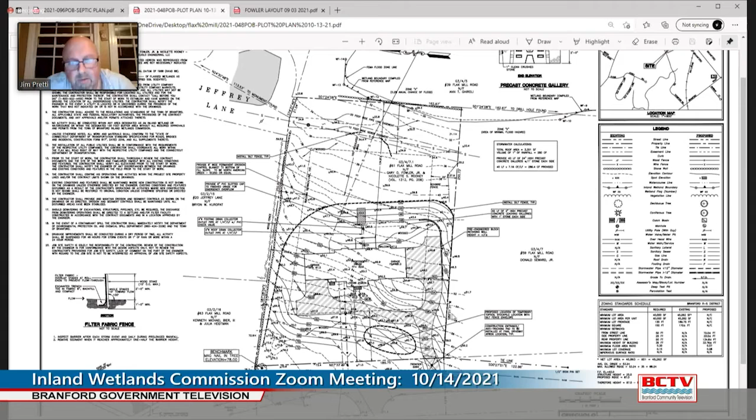Here's the plan: there's a garage over here, and again we're dealing with some slope on this lot, so we're coming in on the lower end. There's a garage at this end at the main level of the house. It's a one-story ranch house, with a walkout basement on the back and a garage under the side of the house. We do have the house plans I could show to clarify that.

But we are showing silt fence basically down along the whole property line, along the back of the limits here, and then along the other property line, a topsoil stockpile area, and the construction entrance.

Again, just because of the grades here, we did have to fill a little bit around the back, so there is this area right here that's within the 100-foot buffer. And then the sewer lateral has to come down and connect into the sewer line. The point I chose was from a stub that was left for this property when that sewer was put in, and that's the approximate location of the stub from the engineering department records. But if we needed to angle this and come up the hill at a slightly different location, we could figure that out in the field. We would put some silt fence around this so the trenching would be protected from migrating any farther east.

That's it. Single family home, public utility connections other than the gas and water are in the road, but the sewer is in the back.

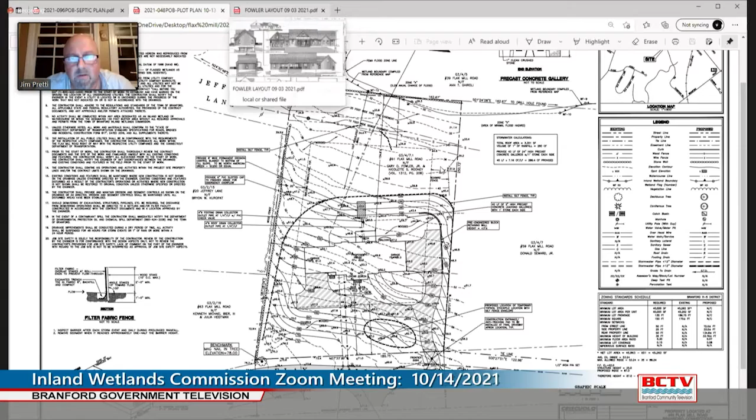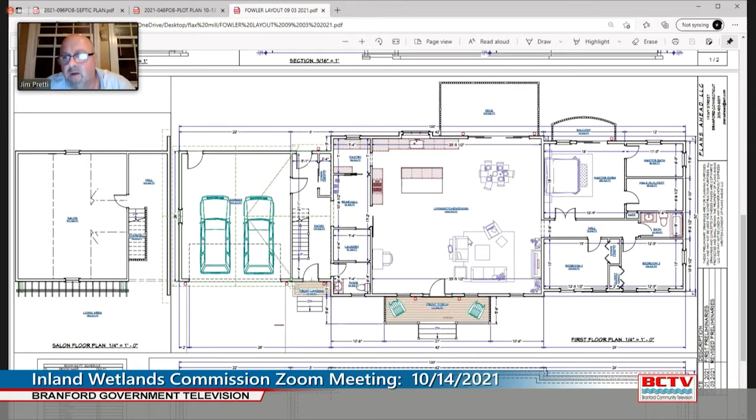No, this is a house for the Fowlers. In fact, here's the house that they're going to build. You can see here's kind of a rendering of it, and this is the front elevation, and then there's the side with the garage under on the end. But it's a little bit spread out because it's a ranch, but I think because of the height regulations in town, it couldn't be a 2-story house because you have to take the average grade and it does drop off. So they are trying to fit it into the slope as best as we can.

Jamie, Commissioner Basserman, your comment about an updated delineation. Can you say more about that?

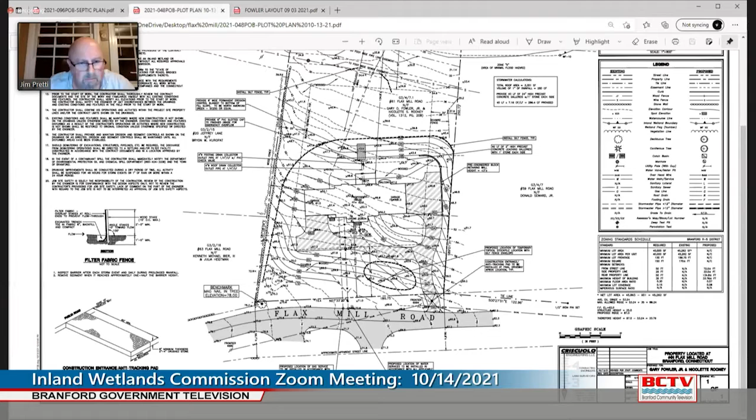I was going to mention that I do have. Can you see that? Can you see the different map now? This was the LWF survey of that rear piece, and you can see here's our lot. The wetland comes in here, and then because they were off property, stopped, and then they started again. If you looked at the contours and the FEMA line, it's 99% sure it doesn't really migrate any farther upstream than what we show on this other plan. You can see the way the contours are all curved this way here.

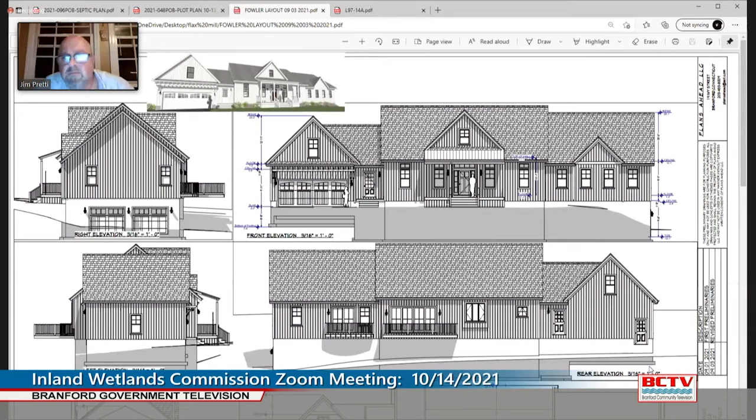Pretty consistent. But this plan, to answer your question, let me go back. This was 1999, this LWF map. I guess, given the lack of variation on the existing 99 delineation, is there much to be gained by an update?

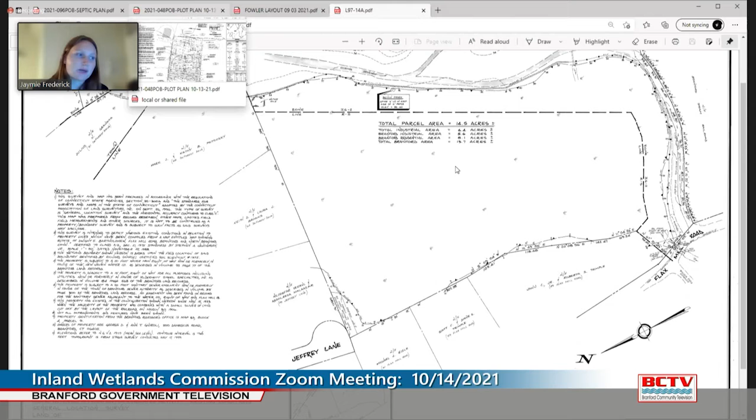Jaymie Frederick, Inland Wetland Agent. I think the majority of the activity is pretty far away from the wetland, so if the commission is comfortable with the information on hand, I think that could be reasonable. Any future activity that might be beyond the proposed limit of disturbance or silt fence would trigger needing the updated wetland delineation. However, that is up to the commission to decide. Ultimately, there's a little corner where there's probably a little bit of on-site wetlands in the southeast corner of the site, right here. But the upland review area was kind of extrapolated, assuming that. So I think it's a pretty reasonable approach.

Commissioner Greenwich: I believe that this can be given to Jamie as wetlands officer to handle administratively. The amount of grading within the 100 foot is very minimal, and the only real activity is putting in that sewer line, and that's a pretty cut and dried thing, and none of it approaches the wetlands itself. So I would recommend that we let Jamie handle this administratively.

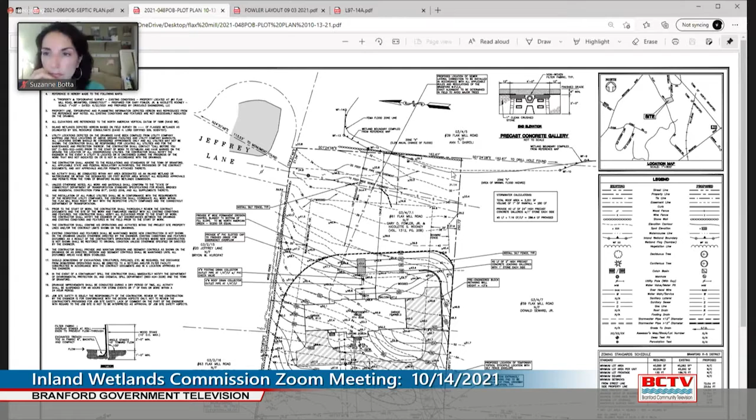Is that the general feeling amongst the commissioners? This is Commissioner Botta, I agree. Commissioner Begum: Are there anyone that would not recommend agent approval? Okay.

Thank you. Inland Wetland 211003, 49 and 81-111 Commercial Parkway, the construction of a last mile e-commerce station.

Materials in your packet. We believe we have somebody for this application on the call this evening. You do, Mr. Chairman? Before you start, Mr. Nuff, Jamie, is there anything that you've asked Mr. Nuff to pay particular attention to in what he's going to present tonight?

Jaymie Frederick, the wetland agent: Not particularly. We did talk a little bit about the stormwater management and how important that is given the watershed. I will hand it over to the applicant without further comment. Sure. Thanks, Jamie.

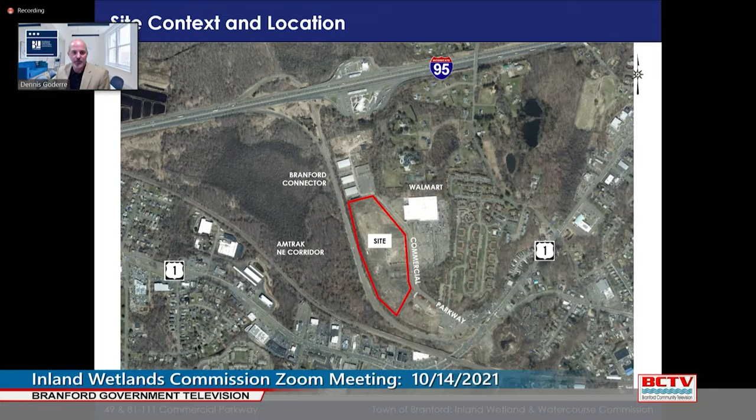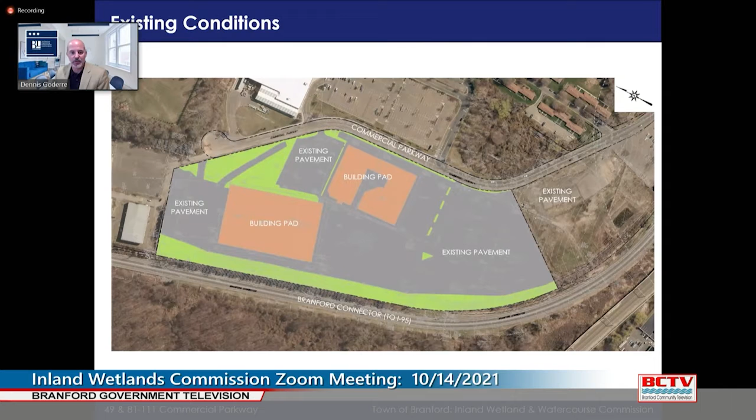It's located between Commercial Parkway and the Branford Connector, with access from Commercial Parkway across the street from Walmart. As I'm sure you're aware, the site has been substantially developed for many years. There are existing building pads that remain, as well as a substantial amount of existing pavement, equaling over 85% of the property being impervious coverage between building and pavement itself.

Before you is the proposed site plan. You will see the building located on the south side, on the right side of the page, is the delivery station of approximately 98,000 square feet. This is serviced by a loading area where deliveries will come in, then be sorted and loaded onto delivery vans where they will depart the site through this drive. Parking area to the south is for employees, and the parking area to the north is primarily for the delivery vans, which also has infrastructure for EV charging for electric vehicles.

There is one wetland pocket located here, and you can see the upland review area—I'll provide more detail on that later. And then the other offsite wetland finger is located down here to the southwest, and you can see the upland review area as well.

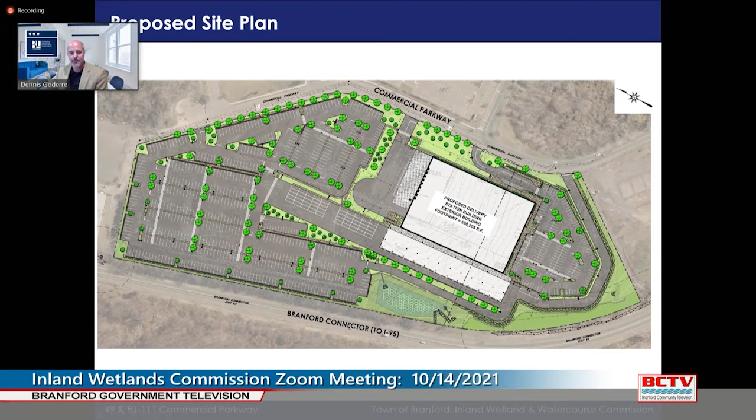Specific to the regulated activities, for the northern wetland there is a small area here which would be some pavement as well as landscaping within that upland review area—again, no filling of the wetlands. And then along the southeastern wetland finger, it is landscaping, retaining walls, and pavement to accommodate the circulation of the site. Overall, we are reducing the amount of impervious coverage within the upland review area by almost 35%.

There's almost 19,000 square feet of impervious coverage that exists today, and we propose to bring that down to just over 12,000 square feet, for a total of about 0.81 acres of activity within the upland review area. That's not all new activity—that's just the total of where we are proposing. And this dashed line represents where the existing edge of pavement of the parking lot is currently today.

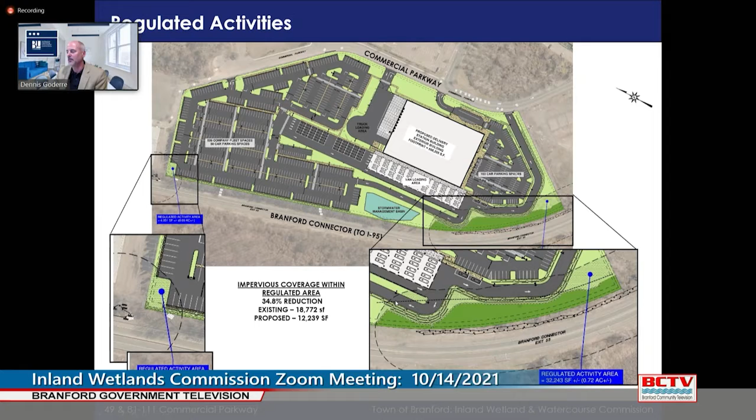This graphic represents the proposed stormwater management system. There's primarily, I'll say, three systems.

Starting on the north, we have a subsurface detention system that collects the runoff from the parking area before it is discharged off-site. There is another system in the middle which collects from the parking and then the van loading area. I should also mention that the van loading area has a canopy, so there's a roof over the pavement.

This discharges into an above-grade stormwater management basin, which then outlets out at this point before finding its way out into this wetland finger. There is a rain garden all along this landscaped island as well to help with stormwater quality and infiltration.

And then the third area is another subsurface detention facility, which handles the water before it is discharged into the existing pipe network, which is then brought underneath the Branford Connector.

There is also a small fourth system that collects runoff from the driveway for the vans that exit the site, and then is discharged into a level spreader. At that point, I'll turn it over to Matt Davison to discuss a little bit more about the wetlands.

I've never seen a piping collection and conveyance system designed for a 100-year storm. Typically design standards for different hydraulic features vary. For instance, typical piping designs are only a 10-year storm, whereas streams would be more of a 25-year storm, and significant streams would be a 50-year storm. The 100-year storm is just your worst case scenario, just to make sure there are no detrimental impacts downstream. Sorry, that's the long answer. But basically, standard engineering practice is for piping systems to either be a 10 or a 25-year storm, and sir, your town requires a 25-year storm in your subdivision regulations, so we opted for the more conservative 25-year storm design.

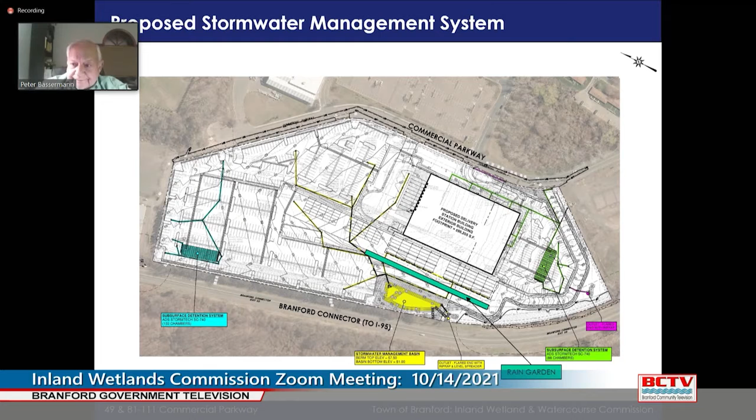Any other questions from the commission? About scheduling that site walk? We want to do that a week before? What about the next meeting? Are we looking at a Saturday, because we're losing afternoon daylight very quickly?

Just a quick reminder, the next meeting is a week early because of Veterans Day, so the next meeting is November 4th. If we were to do the site walk a week before, it would be October 28th, and sunset, since clocks don't change yet, is around 5:50. So you would probably want to have the site walk at 5:15ish, just so you don't run into daylight issues.

That may be a problem, because I think we've tried to do 5 o'clocks before, and people have other commitments. I'm okay with a Saturday if that is the commission's desire.

So I hate to say Saturday. Go ahead, I was just going to say the Saturday before would be October 30th, if that works for people. Yeah. I know it's not great, Halloween's coming, kid time stuff, but maybe in the morning, like 9 a.m. Is that terrible? Costumes optional? I have a commitment, but I'm sure you'll have a quorum.

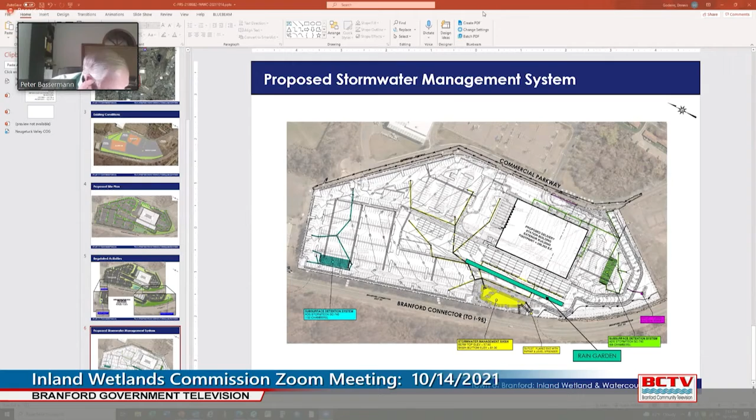Good, and it sounds like somebody from the applicant team can be present? Absolutely, so probably more than one of us. Okay, and just real quick, commissioners, is there anything that you want to have marked out in the field for reference purposes?

Yeah, this is Commissioner Boda — I think it would be helpful to have the basins noted, and probably the corners of the building. Okay, I'm sure we can do that. Commissioner Papantonis — and I'm assuming Commissioner Boda intended this also — the rain garden area.

So probably the stormwater management locations in general. What about the end of the retention wall for the south? The edge of that, Commissioner Bassermann. I think that would be good to know where that is. We'll do our best to indicate where all the primary construction activities will be taking place, whether it's the stormwater basins in the building, the canopy, the rain garden, the retaining wall.

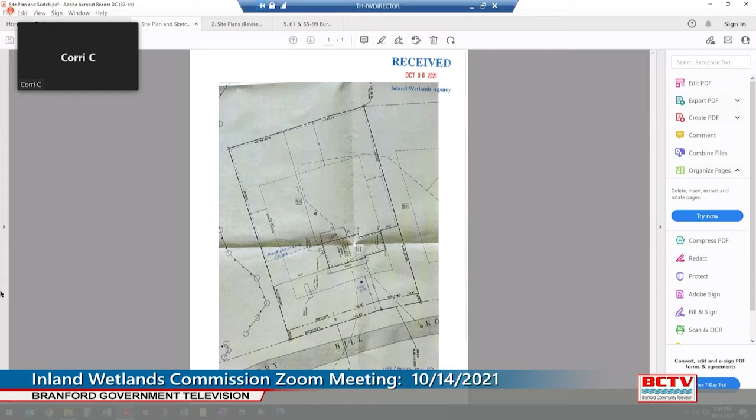Commissioner Bassman: Do you know how they intend to set the posts for that fence? Yeah, it's going to be 2.5-inch terminal posts with 1 5/8 line poles, 1 3/8 top rail, 6-gauge bottom cable. But how are they going to get the post in the ground? They're going to dig into the ground. It's a mixed cement post footing, but we won't be cutting any trees down, and we won't be moving any shrubs or vegetation at all. Machine to dig the holes or not? I don't believe so; the company we've received quotes from, it appears they're going to be doing it by hand.

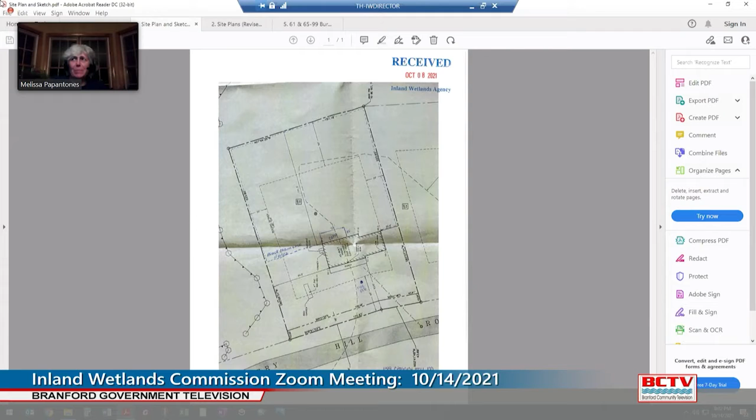I guess I would agree, it looks like a good candidate for agent approval. Anybody disagree? Commissioner Boda: I think it should go to agent approval. Anybody feel different? Commissioner Grenell: No, I agree, agent approval. Commissioner Kraus: I agree. Commissioner Papantonis: I think you can make it unanimous. Great, thank you for the summary and presentation.

Next up, applications for review. Inland Wetland 210801, 175 Cherry Hill Road, an 11-lot subdivision. Looks like this item is tabled, but we have a fee assessment review for this evening. Jamie Frederick: The applicant requested that the item be tabled because they're responding to comments that the commission had at the last meeting. There is a fee assessment for review, however I told them that probably would not be considered at this point until the additional materials are presented. I think we have that on there as a reminder, but I think it would be appropriate to table that item as well. Thank you, I think that's been our practice, so I agree.

Okay, Inland Wetland 210802, 61 and 65-99 Burban Drive, a multifamily residential development. Also looks like a fee reduction request on this as well.

Mr. Chairman, John Duff again for the record, 147 Broad Street in Milford, here tonight on behalf of the applicant. With me is Todd Ritchie, professional engineer with SLR. We were before you a couple months ago. The first night we were there, we discussed the possibility of agent approval. Jamie dug into the details a little bit, had a bunch of questions and comments. We have responded favorably to all those comments and questions, including the modification of the plan on the abutting parcel of property. Jamie has given you a series of conditions of approval, all of which we would be happy to accept. She asked us to discuss with you a little bit about the most important change in the plan, which is the work that would be taking place on the abutting parcel, and you have the authorization of the abutting property owner for that work. Just as a quick reminder, this site currently has no stormwater treatment, so one of the proposals is for us to provide stormwater treatment where none exists. So with that, let me give you Todd Ritchie, and he can share the site plan and describe the work that has changed from when you first saw this.

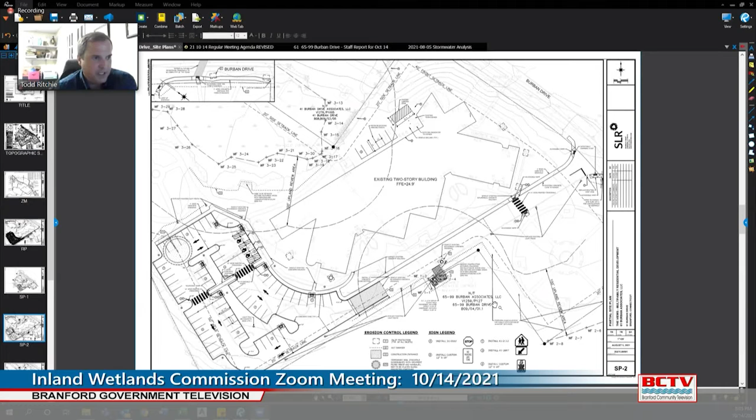As John mentioned, one of the items in the last round of comments from Jamie was about the stormwater pipes. You have one that currently flows from the wetlands to the north and to the south, underneath the building, and that channelizes the overflow from the wetlands. Then you have various on-site drainage pipes that also flow to the same location and terminate through an existing head wall that's right off the driveway.

The request was made, since this site has been in disrepair for some time, and the stormwater system hasn't been attended to, that this area has gained sediment over time. It's equalized between the two locations for its amount of flow to the north and south. So while we have equipment out there, we want to clean this out, establish a stabilized outlet for the future, and a location that can be maintained from sediment going forward.

So we've proposed a scour hole, which I'll show a detail of in a minute, located right at the head wall here. We've sized it for the 100-year storm per DOT standards. It's 12 feet long by 10 feet wide, with a depth I'll show on the detail. There'll be a tracking pad for a piece of equipment such as an excavator to sit in a stationary position, excavate out material, ferry it up to this location and onto trucks, and then offload riprap material to replace the excavated material and provide stabilization.

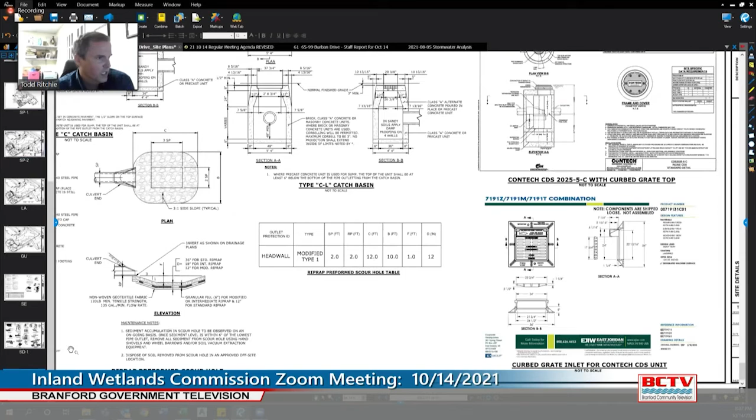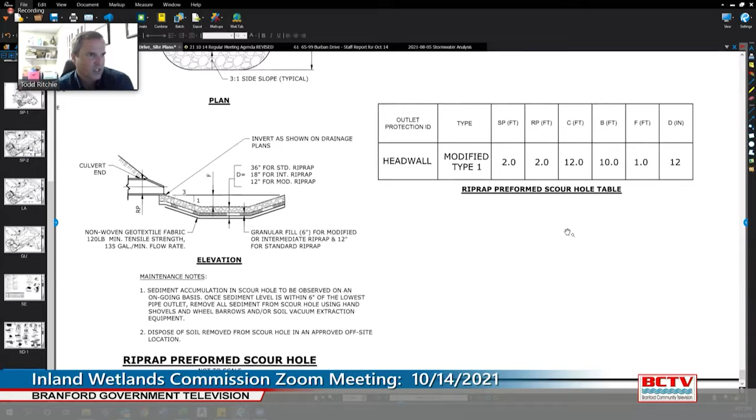I'll show the detail sheet we added this to. So here's the preformed scour hole made of riprap material. This will be at a 3-to-1 slope down from the outside edge, with a depth of 12 inches. Once this gets filled up to within 6 inches of the lowest pipe that discharges to the scour hole, we've recommended in the notes that it be maintained and monitored so that the material filling this 120 square foot area can be removed, either by hand or with a vacuum truck like those used for catch basins, which would be needed anyway for on-site catch basin maintenance.

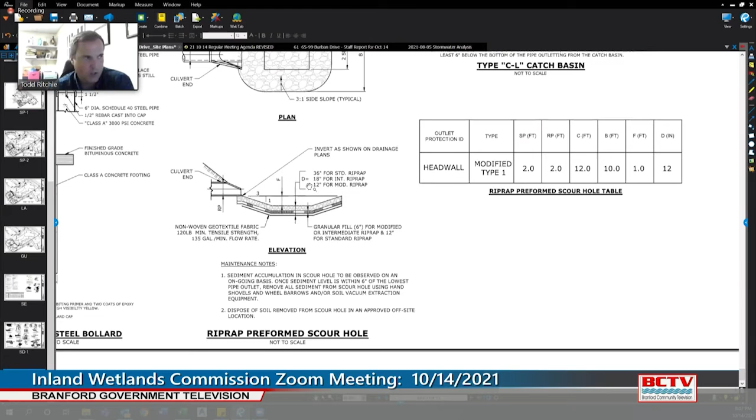I don't know if you have any questions about that. Commissioner Bassman: given your calculations, how often does that scour hole need to be cleaned out?

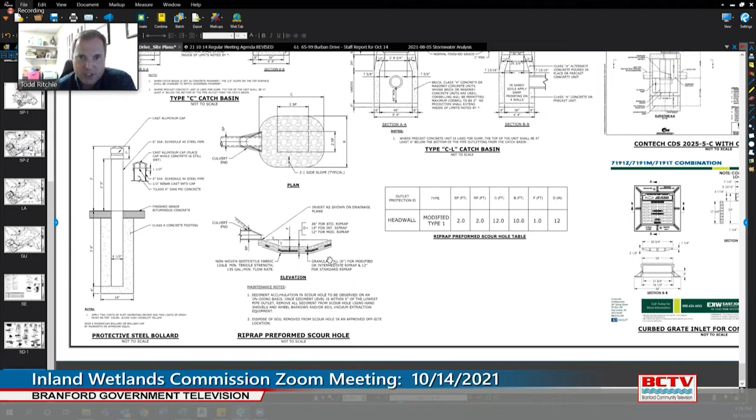Well, it wouldn't be from on-site sediment, because going back to the site plan, as a reminder, we have a stormwater treatment unit here, right before the discharge to this location, and another stormwater treatment unit we're adding here, also before discharge. So all of the driveway stormwater will pass through these treatment units, which don't currently exist. These are Contech-type units that, in addition to removing sediment, remove floatables, oils, grease, and trash. So sediment will accumulate in these from the on-site surfaces.

So really the only main concern for sediment accumulating here is anything washed through from upstream through the culvert from the wetlands, and we can't predict the nature of that sediment loading. But it's periodic, and we recommend it be monitored every 6 months or so, typically in the spring and fall after the leaves come down.

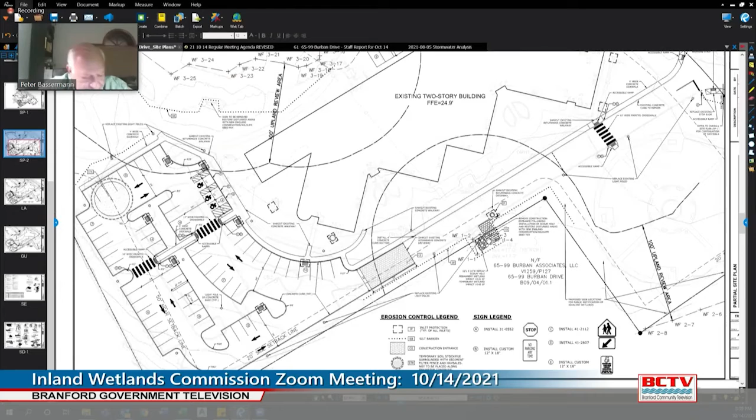Jamie, you had also mentioned last time some missing sediment erosion controls along Burban Drive. We've added those inlet protections and the sediment silt fence. I believe that was just something that didn't show up on our plan, but it was there.

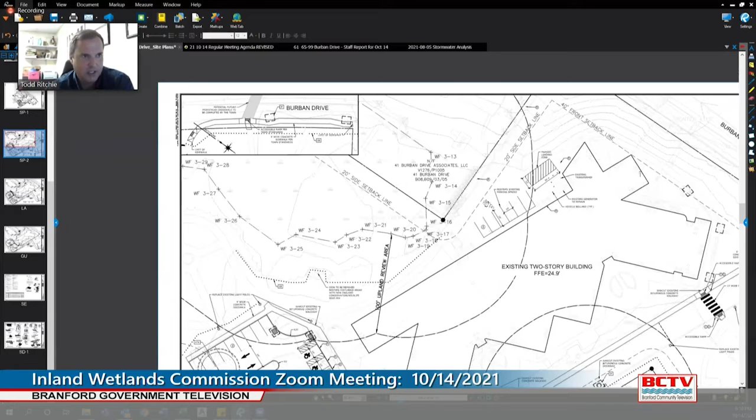This is Commissioner Kraus. Can I ask a question? I assume the property owner or developer will monitor and keep those stormwater basins clean and clear. But how about the ones on Burban Drive? Will the town become responsible for those, or still the property owner?

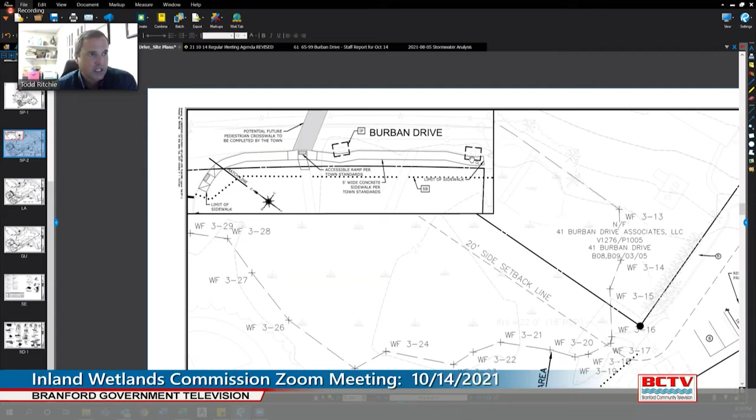Are you talking about these ones here, the catch basins? Yes. The catch basins on Burban Drive are on town property, so that is the town's responsibility. Okay, but the other ones will continue to be the developer's even after it's all completed? After everything's completed, everything but the Burban Drive catch basins will be part of the development. Okay, thank you.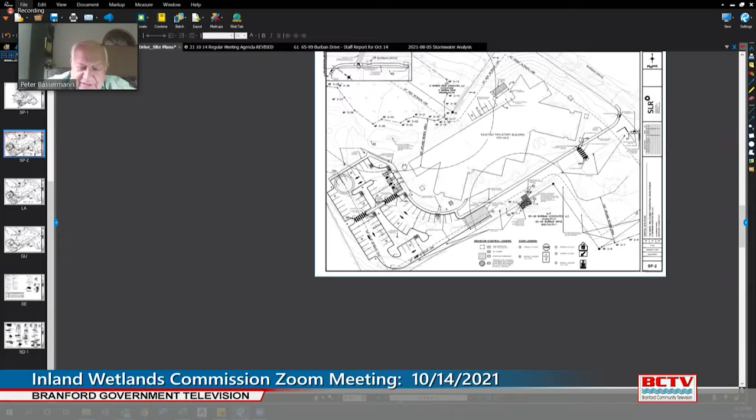Any other questions from the commission regarding the change to the plan? Jamie, can you post those conditions of approval?

Jamie, you're muted. Jamie Frederick, the wetland agent: the first condition is pretty standard inspections. I don't know if you want me to go through all of them or if you want to read them yourselves. I think the print is large enough where I can read it.

Jamie, I can't remember on this application, were there vegetation that was added? Jamie Frederick, the wetland agent: there are some proposed plantings, but I wouldn't call them wetland enhancement plantings. They're more along the lines of landscaping islands. So I know we didn't have the monitoring of the plantings in there, and that's the reason you're saying they're really not wetland issues. That would be correct.

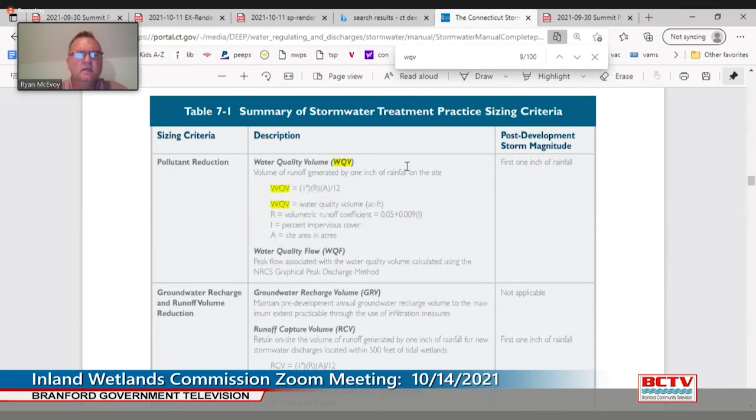So when DEP, this is right from the DEP Water Quality Manual, the water quality volume is a calculation that's based off 1 inch of rainfall and has different coefficients and factors given the percentage of impervious surfaces on the property. So we followed this exact formula that's in the Water Quality Manual to determine what the first flush is. The first flush is identical to the water quality volume, which is a calculation based on 1 inch of rainfall on the site. So in my opinion, they're really one and the same.

Thank you. This is Commissioner Boda. Thank you for that clarification.

Commissioner Greenalch? I'm sorry, somebody have a question? I'm sorry, Dick, go ahead. I was going to make a motion.

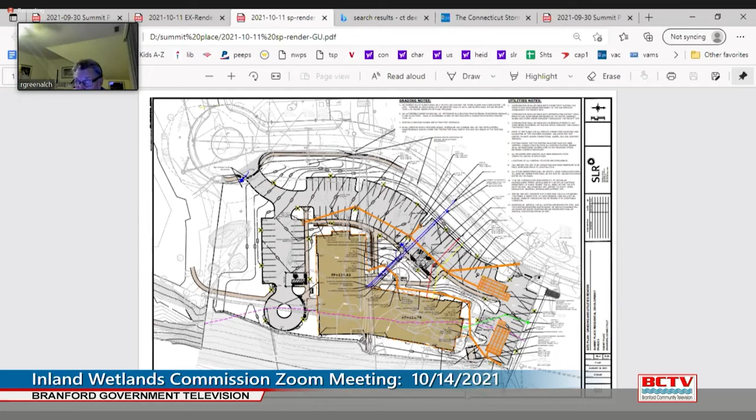Commissioner Greenalch, before you do that, Dick, can you post the conditions, Jamie, on the screen? Sure, one minute. And then I'm going to have to take a quick break and plug in my laptop because my battery's about to die and the whole meeting will end. Sorry about that, folks. Go do it now. For Mr. McEvoy, that would be terrible. Be like, I don't need that. We're about to click. Good night. Waited through the other ones. Oh no.

Jamie, can you, this is Commissioner Bassermann, can you increase the size of that type font? Momentarily, it needs to plug in first. Give her a second. All right. Better, thank you. Oh, and these are not the conditions. Let me know when you're ready to scroll. Are we all set?